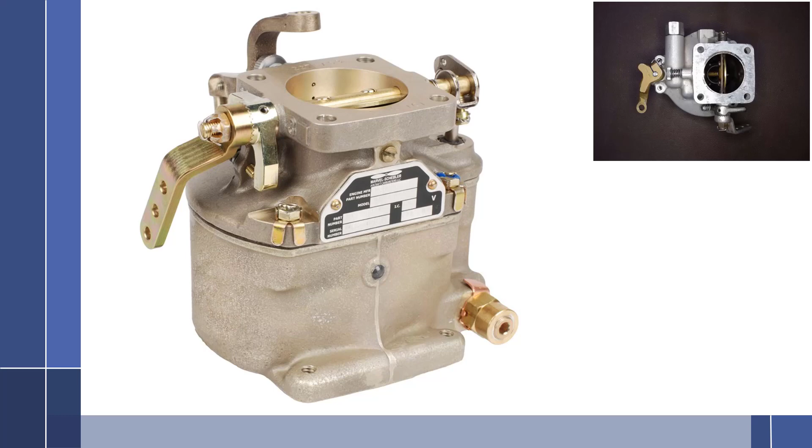Hello, I am Kevin. I am one of the instructors at the Sacramento City College Aircraft Maintenance Technician program, and today we are going to take a very in-depth look at the Marvel Schebler MA-3A carburetor.

This little carburetor is used on small aircraft, say about a Cessna 150 at about 100 horsepower or so type of engine. This particular carburetor does not have the accelerator pump system on it. So if you're looking for a carburetor with the accelerator pump system, that is going to be in a different video. But the great thing about this one is it has some options that the accelerator pump system does not. So stay tuned for that.

All right, let's jump into this carburetor. Like any aircraft carburetor, I like to divide this up into two basic systems: the idle circuit and the off idle circuit. Idle circuit is when your engine's idling, anything up to about 1,000 RPM. Anything over 1,000 RPM, we're pretty much looking at an off idle system. So off idle system is what we're going to look at first.

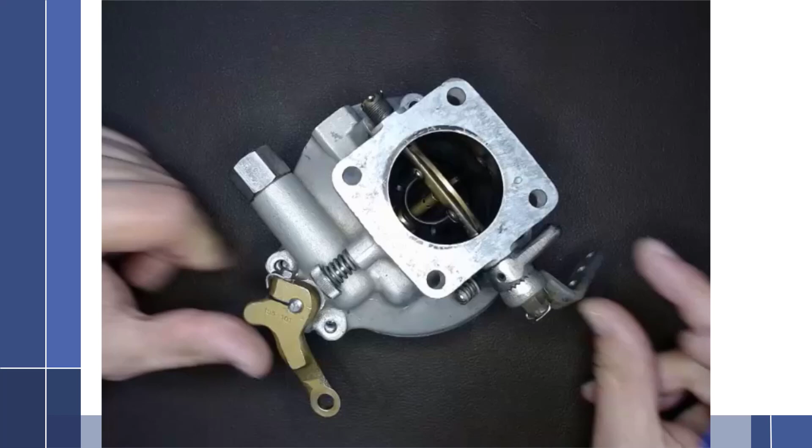But to get acquainted with this carburetor, let's take a look at a couple of items on here. Number one, over here we have the throttle shaft, the butterfly valve or the throttle plate, and we have the manual mixture control over here. We'll talk more about this stuff in the setup towards the end of the video, and also a couple of things about airworthiness directives too.

All right, so let's take this off right here and take a look at what is going on and how this carburetor operates. There we go. So on the inside, you can see we have the float bowl over here. We have the floats over here, and we'll talk about each one of these things as we go.

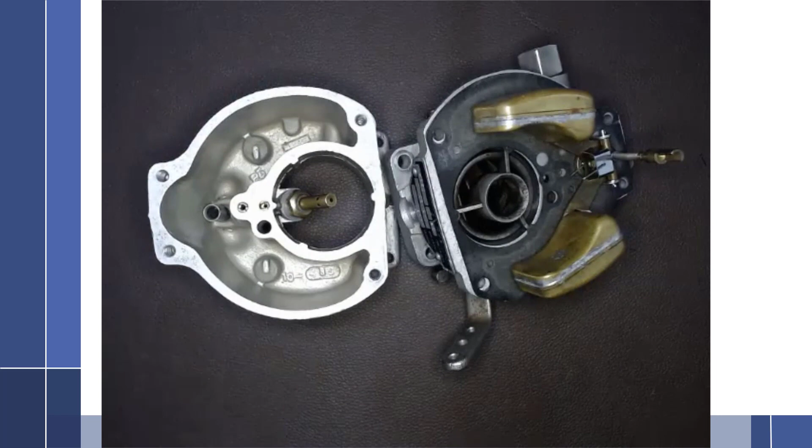All right, so let's turn the page here and take a look at this drawing here. Now, I know this does say model MA-4 SPA, but this is the drawing that is provided by Marvel Schebler to cover both the MA-4 SPA and the little MA-3 carburetors as well. So there's some differences, but for the most part, this is going to walk us right through it without any problem whatsoever. Although I will admit I had to make a few corrections to the drawings.

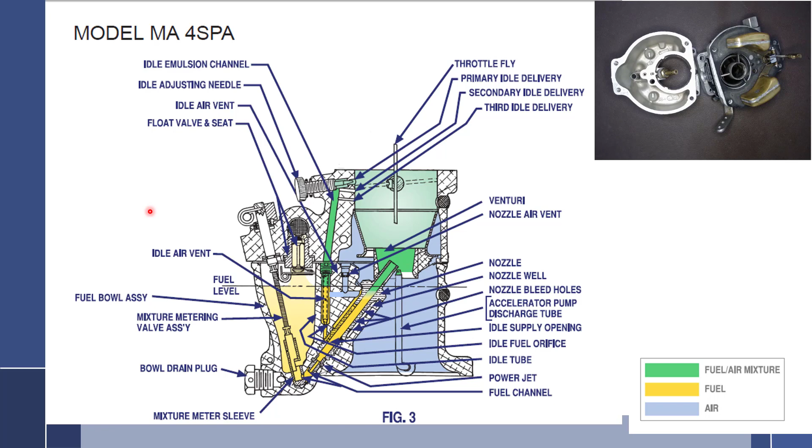All right, so to start with, how does the carburetor work? Well, let's talk about we're a drop of fuel, and let's take a look at the passageways and the path that fuel is going to take.

All right, so to start with, fuel is going to enter here. And there is a screen in here. So that screen should be checked every, say, 100 hours or annual. I would say no more than that. I like to check them every time I do at least an annual 100-hour inspection. We don't want any debris clogging the fuel path. That would be a problem.

All right, so fuel goes through this into this chamber right here where it enters the needle and seat area. So now this, of course, is upside down to the way it sits on the aircraft. Normally it is sitting this way. I'll move it just to the side so we can see.

So when there is no fuel in the float bowl, the floats are going to drop down. And as fuel enters the float bowl, the floats will then float up until it blocks off fuel coming in the needle and seat area. So let's open that up, take a look at the needle and seat area and see what is happening there and how that works.

So we'll pull that pin out. By the way, that pin is supposed to be a cotter pin. There's a lot of things I've already, screws and such that I've taken out already for ease of doing the video. But here we have our needle right here, and this is the seat right there.

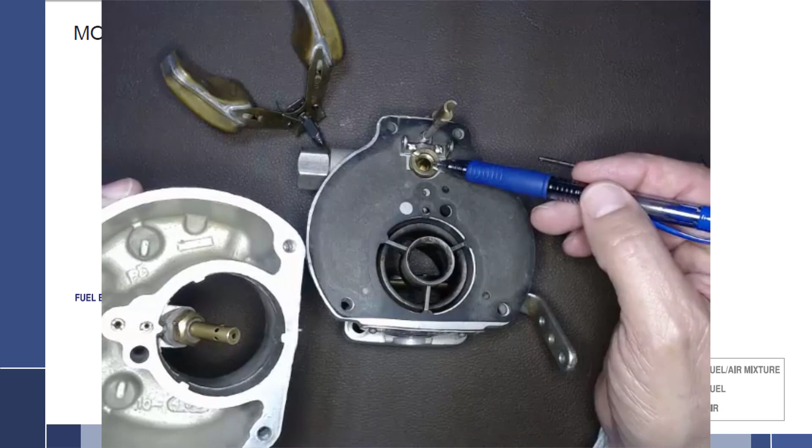So as the floats raise up, that needle right there sits in the seat and blocks off the fuel. When the needle is off the seat here, fuel comes in and out of this hole right here into the float chamber. So it comes out of here, fills up the float chamber until the fuel level gets to a specific height, pushing the needle up into the seat, blocking off the passage of fuel. Now, the level that these floats are at, it's different than some carburetors.

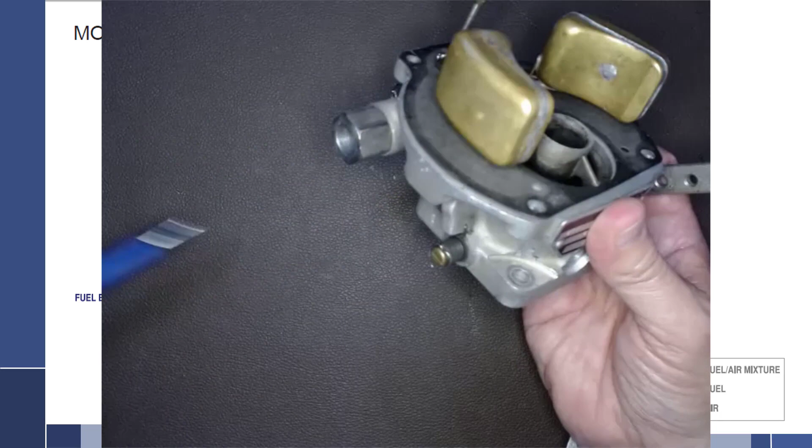We don't actually measure the float level per se, but rather when you get into the instructions, you measure this distance right here with a drill bit or calibrated rod, and that's the float level measured there, rather than the actual fuel level, like a Stromberg, where you'd actually measure the float level directly.

All right, taking this back off, we'll set these out of the way. We'll pull off our gasket and set that aside. So we're talking about fuel coming in through here, filling up the fuel bowl, and we are talking about the main discharge system right now, not the idle system.

Looking at our drawing, we can follow along here too. Here's the screen I talked about, so fuel is going to enter right here. It is going to go through the needle and seat and fall down into the float chamber where the fuel will fill up the bowl until it gets to this fuel level.

There's my desired fuel level. When it gets to that point, the floats will have raised up, blocking the fuel from coming through the needle and seat, stopping the fuel and stopping the level right there. And that's where it will sit until we start the engine.

Once we start the engine and it's running, fuel will be used. As fuel is used, the level will drop down a little bit, and as it drops, so will the floats, which allows more fuel to come in, raising the level back up and keeping it roughly at that point.

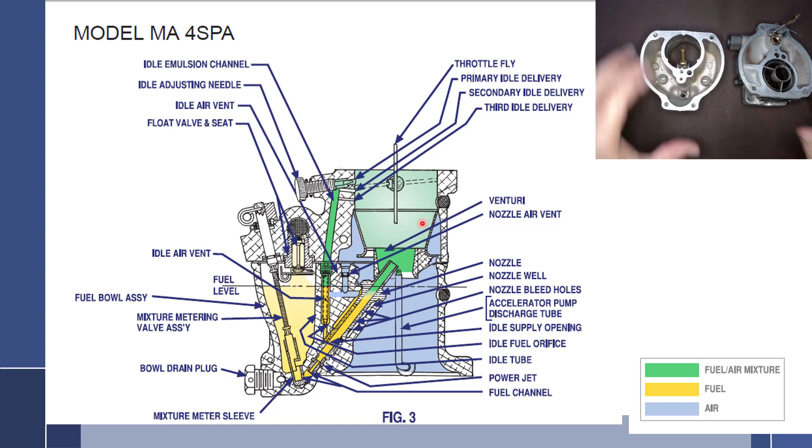What is causing the air to move through the carburetor is we have four syringes, we'll call them pistons. The pistons are moving back and forth and sucking air just like a big syringe, four of them on most of these little engines, and that is drawing in a rather large quantity of air coming across two venturis.

In this particular carburetor we have a primary and a secondary venturi. It's going to pull the air across there. Here's our venturis over here, and you can see them.

The way a venturi works is by Bernoulli's principle, which basically says that as air is drawn across a venturi, the air is going to accelerate. And whenever air accelerates, it is going to have a drop in pressure. So that air moving through these venturis is going to cause a drop in pressure, otherwise known as a vacuum.

That vacuum, low pressure, will want to draw fuel out of the carburetor up and into the engine. The amount of fuel drawn out of the discharge nozzle right here will depend on how much air is flowing through the venturi, creating the vacuum, versus the air pressure inside of the float chamber.

So again, the amount of fuel that comes out depends on the difference in air pressure between the venturi and the float chamber. That difference of air pressure is known as fuel metering force, which is a little strange since we're talking about fuel metering force being air pressure, but you heard me right. The difference in air pressure between these two things is called fuel metering force.

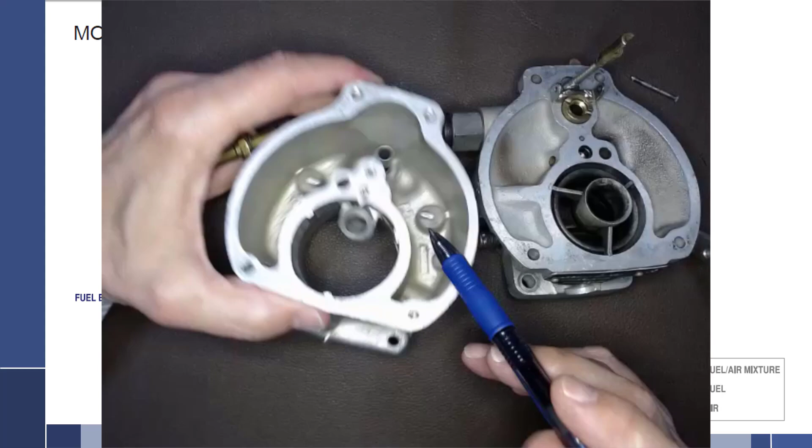Now let's take a look at our carburetor down here. So we have the fuel, as we talked about in the drawing, in the float bowl, and it's going to go down through this hole right here. This is the metering sleeve. So we're going to go through the mixture metering sleeve up into this passageway that's drilled right in like this. And we'll take a look, we'll pull out the discharge nozzle.

And we're going to look at this passage right here. You can see right down in there, the fuel comes through that mixture sleeve, through a drilled passageway into this chamber, where it is going to meet our discharge nozzle. So this is the discharge nozzle right here.

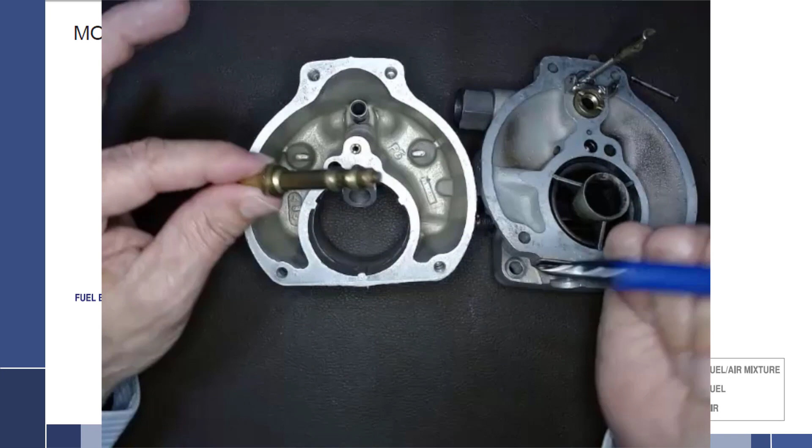This right here on this particular carburetor is called the power jet. So the power jet is the metering device. On other carburetors, we would call it the main metering jet. That's the word I wanted. Main metering jet. On this particular carburetor, it's called a power jet.

Same thing. So this orifice right here is what determines the maximum amount of fuel that is allowed to go from the fuel bowl into the discharge nozzle assembly. So from the discharge nozzle assembly, the power jet up through here, and then out these holes right here along the side and right here out into the low pressure area of the venturi.

So that's all there is to the fuel, the main system as far as fuel goes, right? Just through the screen, through the needle and seat, into the bowl, from the bowl, past the mixture metering sleeve, power jet, discharge, engine. Very simple. But now we have to make it complicated.

You can see that there are a series of holes around here. There are some holes between these threads, which for right now we're going to ignore, and we're going to talk about those later. But these holes right here, one here, one there, and a series of 3 right here, allow air to enter into the fuel stream to emulsify the fuel.

Now we want to add air to emulsify the fuel for a couple of reasons. One, it breaks up that fuel and creates smaller droplets that are more easily evaporated and will allow the engine to run much smoother and cleaner, because we can evaporate the fuel into smaller droplets rather than large globules that have less surface area than a bunch of small drops, and so that's better.

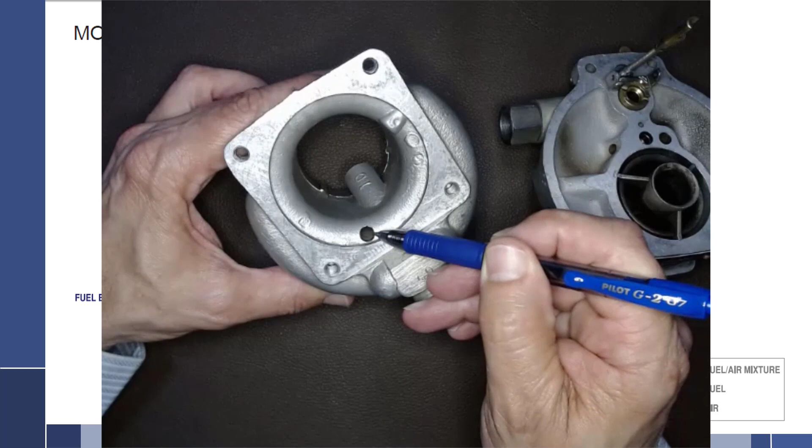So this is the inlet to the carburetor as far as air goes. Air went through the air filter on the aircraft, through the intake system, and then entered into here. So the air going this way is going to go up across the venturi and off into the engine. So any air going in right here is going into the engine.

However, this hole right here is where air is going to enter for our air system that we're going to be looking at internally. So some air is going to go into this right here, and that is just drilled and comes out right there. So air enters here, comes out of right there, and corresponds to this hole right there. So we have this hole. So air is now going to enter this way.

And if we look at it over here, we can see there's a hole here and right there. That is a drilled passageway that drilled right through there. So it tees off, if you will. So this is connected to this, which is connected to this. And at the same time, this passageway right here is drilled down pretty far. We're going to talk about that a little bit later, but it's drilled down far enough that it hits this T right here. So all 4 of these holes are interconnected.

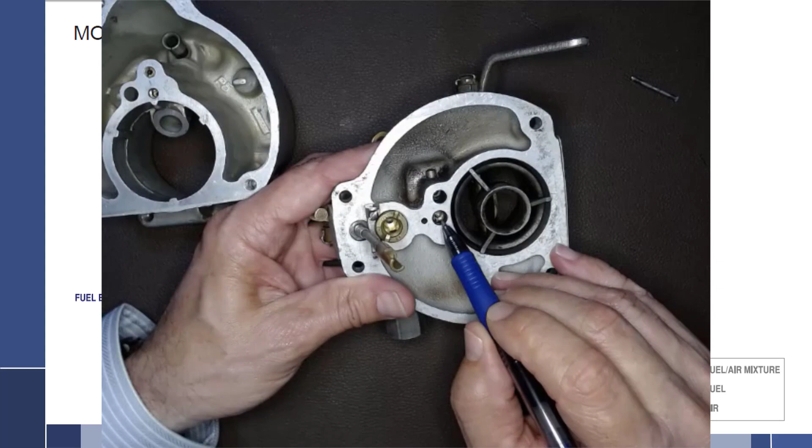Not that one yet. So we're talking about the air here, here, here. They're all interconnected. So again, air was coming into this one. It's allowed to come out of these 2 into the float chamber. So it's venting our float chamber. And at the same time, it went to this spot right here. This corresponds to this hole right here, which is drilled in a couple ways. One, it's drilled backwards.

So right through here into this one—we'll talk about that later. This is drilled straight down into this chamber right here. Maybe you can see right in that, though it's very difficult to see. There's a hole right there, so you'll have to trust me if you couldn't see it.

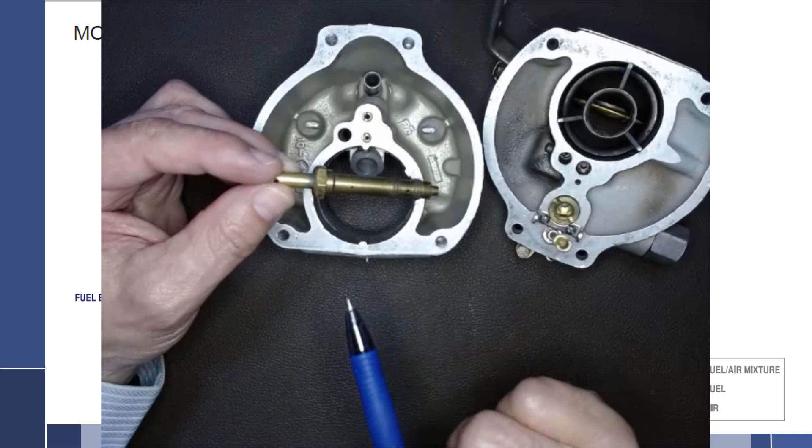So now we have air coming down this way out of here. Real quick: air up through here, up through here, down this way, into the T, turns the corner, comes out of here, goes down in there, and down into there. Once it gets into this chamber, it's allowed to go through these little holes, where it mixes with the fuel and discharges out.

And that's really pretty much it for the main system right there. We've covered both the fuel and the air a couple of times. Let's take a look at our drawing and just go over it one more time.

Air and fuel now discharge out of the nozzle due to the venturi and the difference between the air pressure at the venturi and the air pressure on top of the float bowl, which is referred to as our fuel metering force. All right, so there we go—we have covered the main system.

Now let's move off to the idle system.

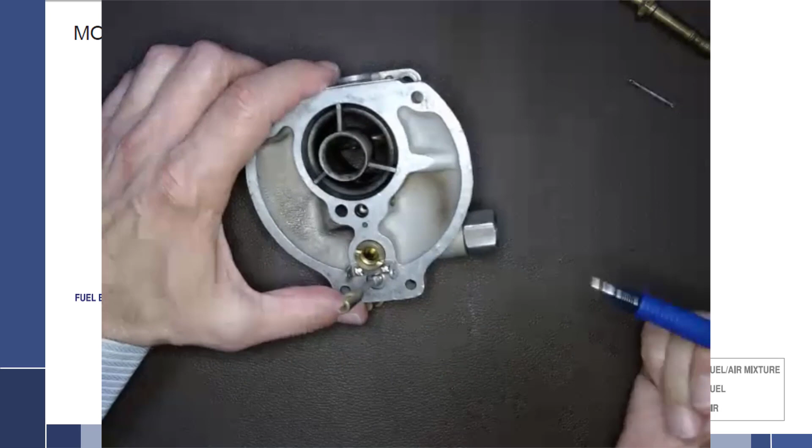So because we have such a small amount of air coming through right here, that means we have very little air going across the venturi. And because we have so little air going across the venturi, there's really not much suction at all—not enough to draw fuel out of the main discharge nozzle. So the main discharge nozzle is completely useless to us because the venturi at this point is useless. We have to have another way of discharging fuel, and that's the idle system.

So again, the path is nearly the same for quite some time. It comes through the inlet, across the screen, out the needle and seat, into the float bowl. From the float bowl it's going to go once again through the mixture metering sleeve and up through this channel, which it did before, into the power jet, which it did before. But instead of moving on into this part of the nozzle, fuel will simply fill up the nozzle.

And we're now going to look at these holes. Before I said we have these holes right here, but we ignored them when we looked at the main system—now we're not going to ignore them. These are a vital part of our idle system. These holes are drilled in between two threads, which pretty much isolate them and create their own little passage.

And what that does: fuel comes up that power jet and out of these holes and off into the idle system. So if we take a look at our drawing over here, we'll see this is right where we were—we had fuel in the bowl.

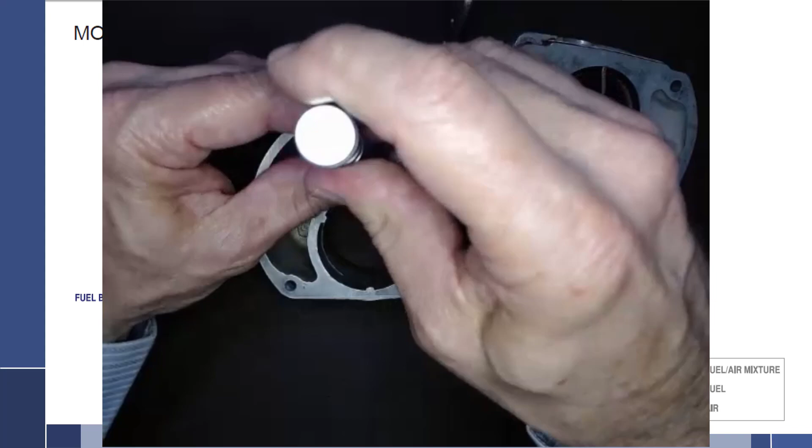It came down through the mixture metering sleeve, up the power jet into this area. Here's where the top threads are. Here's where the bottom threads are. And these are the holes drilled in between those two threads. It is going to go up into our idle tube. So let's take a look at our idle tube.

The idle tube is this passageway right there, and I've already loosened it up so I can pull it out quickly. There we go. Here's our idle tube. Looking at our idle tube, it has a very tiny little hole right there, which is going to be our idle jet, if you will. Just like we had a power jet, here we have the same thing right here. We have the idle jet. So that is the restriction for the maximum amount of fuel that can get up through the idle tube.

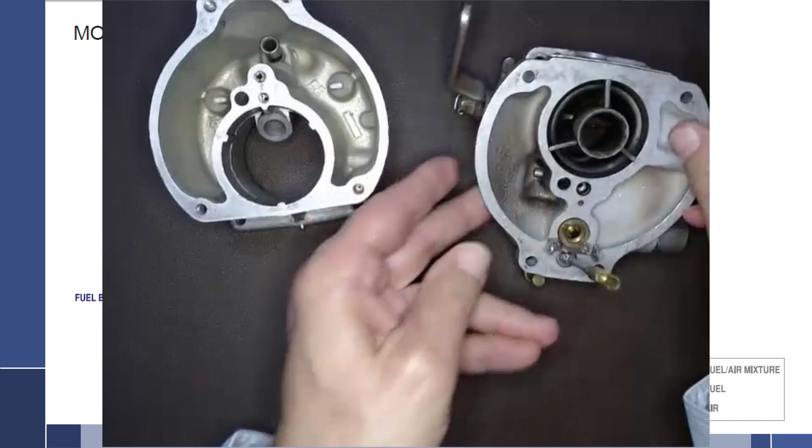So the idle tube then, we're going to notice has a little hole right there. And you can already guess what that's for, I hope. And that is going to be for air. But we'll get to the air in just a little bit. Fuel comes up through this tube, out of this hole right there, because that's sitting right there, into this hole right here, and then up. I know it's down this way, but in the carburetor, it would be up. And those holes right there are going to go up into the throttle body area.

Now let's take a look at our carburetor and see if that corresponds to our drawing. So I'm going to close this. It is spring-loaded to open. And thankfully, the fuel has actually made a clean spot. So I can see 1, 2, and 3 right there. Probably can't pick it up on the camera, but 1, 2, 3 holes, just like our drawing over there. These holes are the discharge holes for the idle fuel.

And what is causing those holes to act as the discharge nozzle is that when this plate is closed, the area above it is subjected to a significant vacuum. Remember, we have 4 cylinders. Even in a Continental O200, that's 200 cubic inches of air it's trying to draw through with each 2 revolutions of the propeller. And that is causing a big suction right here. Air is not getting through this throttle plate very well, so it is going to want to draw whatever it can from wherever it can. And it just so happens that these holes are exposed to that vacuum, and it will draw out fuel from these 2 holes off into the engine.

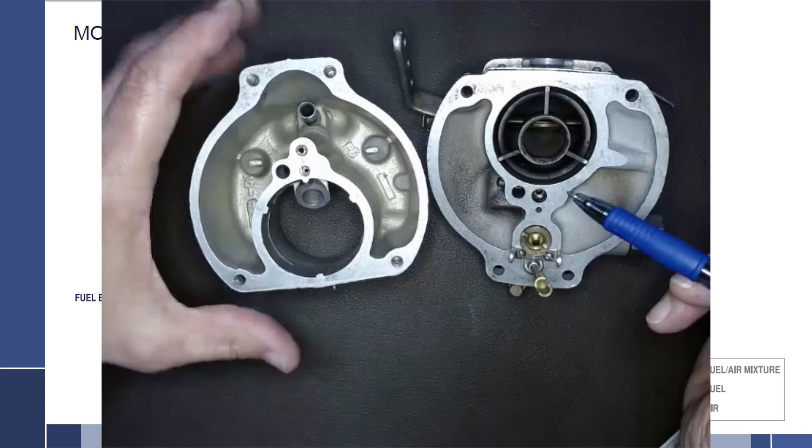Well, if you remember, a little bit ago, we talked about air coming up through here, coming out of here, entering into here where it's teed off. And this is part of that teed system. So air then goes in this way, fills up the float chamber, and then it comes out of here into this right here that's drilled straight down, which will allow us to get some air into this, but it's also drilled backwards.

So if we looked at it, I don't know if we can pick it up on the camera, maybe, but it's right there. It's drilled backwards into that chamber right there. So that is where we get our air right there. So it's right before it enters into this chamber, it breaks off and goes that way. We get air into there, emulsifies, comes up through here.

Now we have air and fuel coming out of this, air and fuel going into this hole. Passageway is drilled all the way up into here where we have the 3 holes. When the throttle plate is closed, we have 2 discharge nozzles. And when the throttle plate opens a little bit, we have 3 discharge nozzles, and that is the idle system.

Now, we will talk about the idle mixture adjustment here in a little bit when we talk about setting up the carburetor. So that is really, in effect, the 2 main systems of this carburetor.

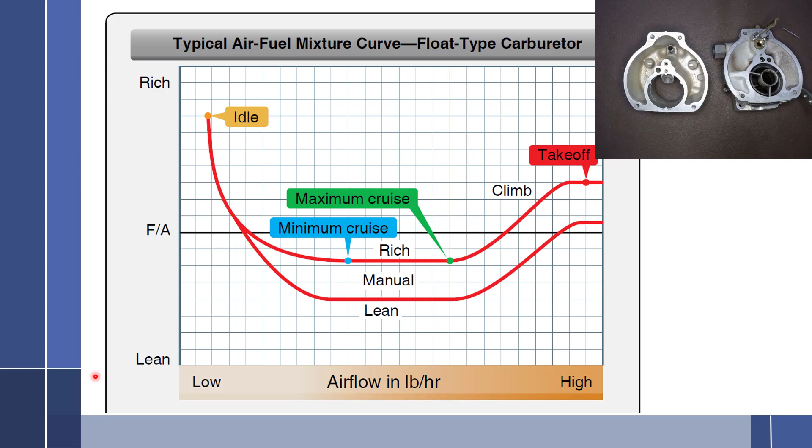If I were elected king for a day, I would call any system that makes the line in the middle go down an economizer, and any system that allows the line to go up at takeoff a power enrichment. That would make things a lot easier, because then we could talk about carburetors that automatically add more fuel at high power settings versus carburetors that drop the fuel in the middle. This particular system we're going to look at pulls the fuel down in the middle. It is called an economizer system.

All right, let's take a look at our economizer system on this particular carburetor. The way it works, we're going to use air pressure, and think back about our air pressures in the float bowl versus air pressures in the Venturi, which was called the fuel metering force. The economizer is going to change the fuel metering force, and the way it does that is through air pressure.

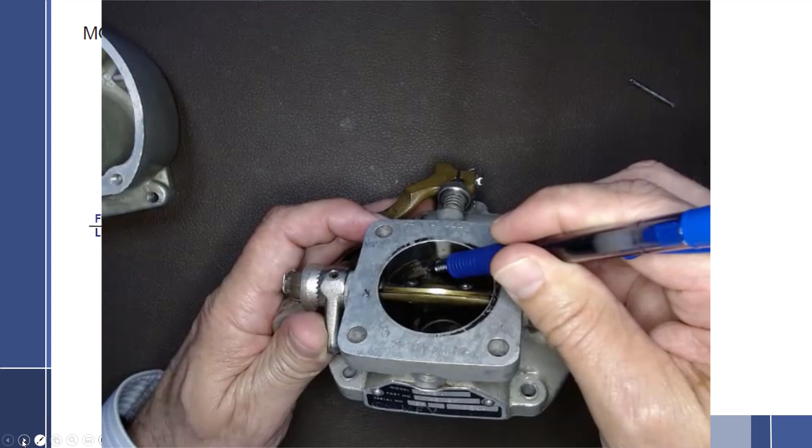Now, what you couldn't see before, and maybe won't be able to see in this particular carburetor, is we talked about these three holes, 1, 2, 3. Hopefully you remember those are discharge nozzles for the idle circuit. Well, what's a little difficult to see is off to the side, there's another hole drilled into this throttle body area. That is the economizer hole.

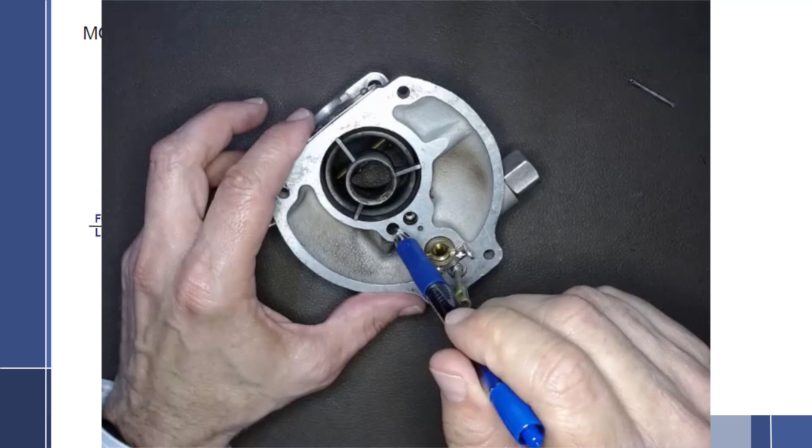We can see up at our chart right here, the economizer hole right there. And that hole is drilled into a passage into this one. Remember, the air originally came through here, up through here, into here, and then teed off. Well, if we go straight down and keep going, there's a little jet down there that is actually attached to that hole right here. So the way this works is when we are at idle...

that hole is covered up and is down in the higher pressure area, because right here is where all the suction is happening. This down here no longer has a lot of suction whatsoever. It's pretty much ambient air, and so that has no effect whatsoever. It's practically assisting this hole right here.

But when we start to open the throttle and uncover that hole right there, now it is subjected to the low pressure area the pistons are pulling. And when we get a little low pressure suction on that, we're going to get suction here, which is now going to take some of the air that was designed to vent the float bowl and take it away. So it is going to create a lower pressure in this area.

Well, if we lower the pressure in the float bowl, then the pressure difference between what is here and what is here at the Venturi is less. So we have effectively lowered the fuel metering force, which means there is less suction on the discharge nozzle, even though there's the same amount of air going through here, and we still have the same amount of suction created by the Venturi. It's just that this is no longer high pressure in the float bowl. It's also getting a little suction to it. So the difference is less, so less fuel comes out.

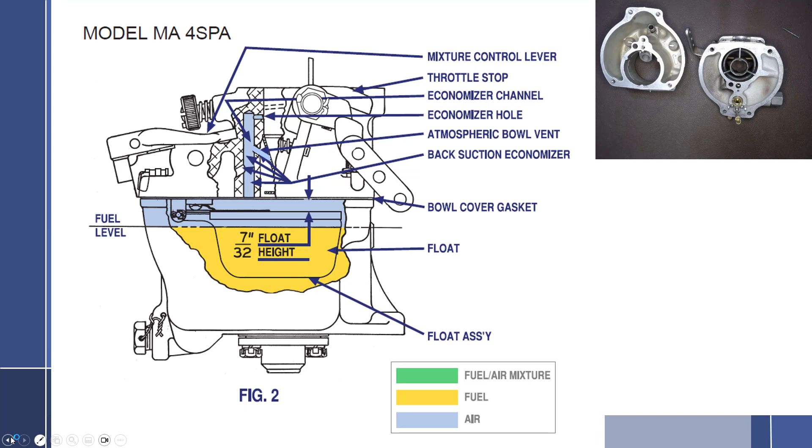So, back suction economizer system — we got that down. If you understood that, fantastic. I think we're both doing great then.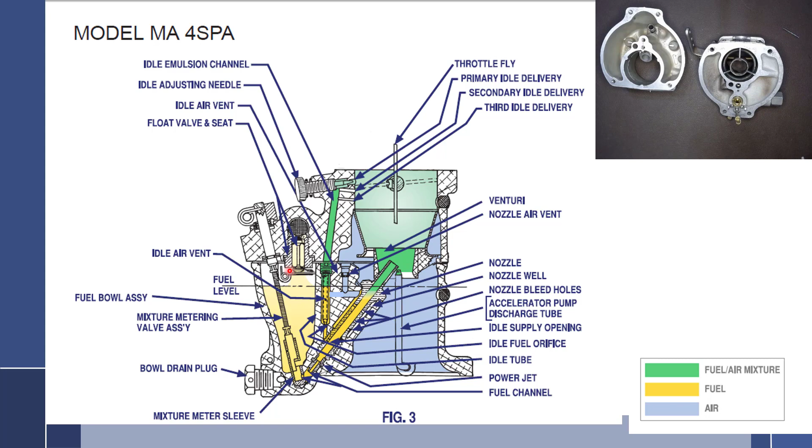All right, so the next system I want to talk about is the manual mixture control system. Let's switch to this one right here, and we're going to talk about it. This carburetor, as pretty much all Marvel Schebler carburetors, has a mechanical mixture system.

As the aircraft goes up in altitude, the brains of the operation, the venturi, has never really been taught how to deal with altitude. It just senses the same altitude all the time. It really doesn't compensate for altitude.

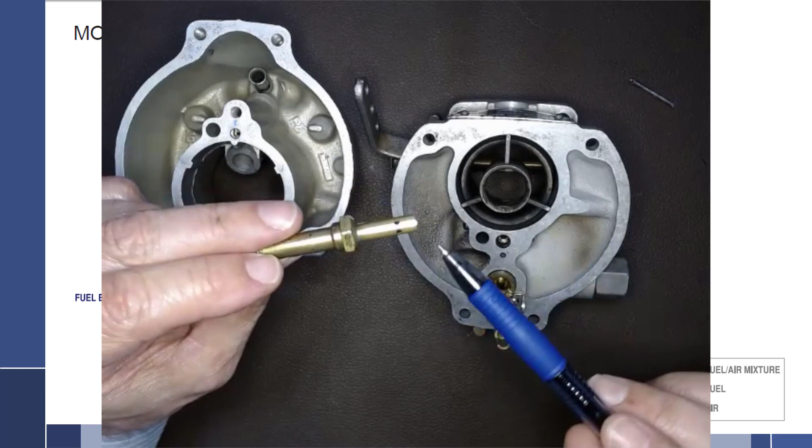So we go up into altitude, and we have the venturi working hard. It's saying, we have X amount of suction, I have that much air flowing through, and that much suction equals that much fuel going out.

But the air around us is decreasing, the pressure is decreasing — we're up at altitude. And now the carburetor is running richer and richer and richer. We already talked about why we don't want an overly rich mixture: waste of fuel, excessive lead, and loss of power.

So we want to lean out the mixture. We need to tell the carburetor, hey, we're up here at altitude, we need a little less fuel please. That is done through the manual mixture control system, which is controlled in the cockpit by the red knob right here.

So we push forward for rich and pull back for lean, and the all-the-way-back spot is called idle cutoff. That's rich, and that's idle cutoff. What's happening is that's moving this valve, or this arm, which goes into the mixture metering sleeve right there.

When we are at full throttle, this sleeve is wide open in here and doing absolutely no metering whatsoever. It's wide open, and the only thing metering any fuel is the main power jet.

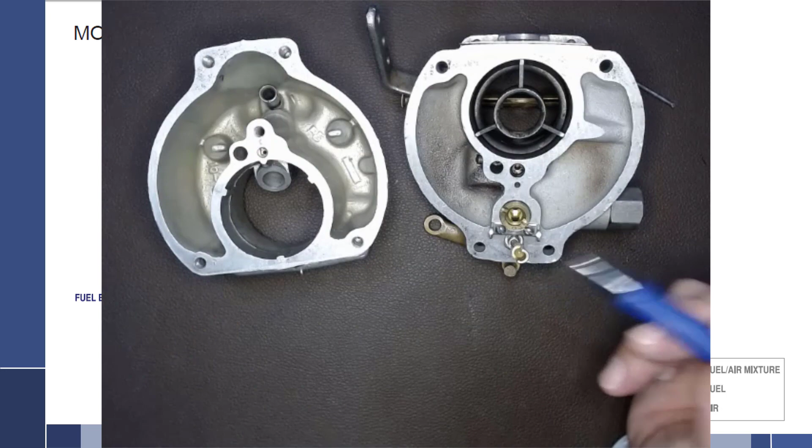But as we start pulling back on this shaft, this rod will rotate and start blocking off that slot down there, to the point where it gets smaller in total than the power jet. If this is the smaller of the two, then this now starts doing the metering.

And so that's exactly what happens. We keep pulling this back, making the slot down here smaller and smaller, which manually leans out the mixture, until we pull this back so far that this valve actually closes off that slot completely, cutting off all fuel.

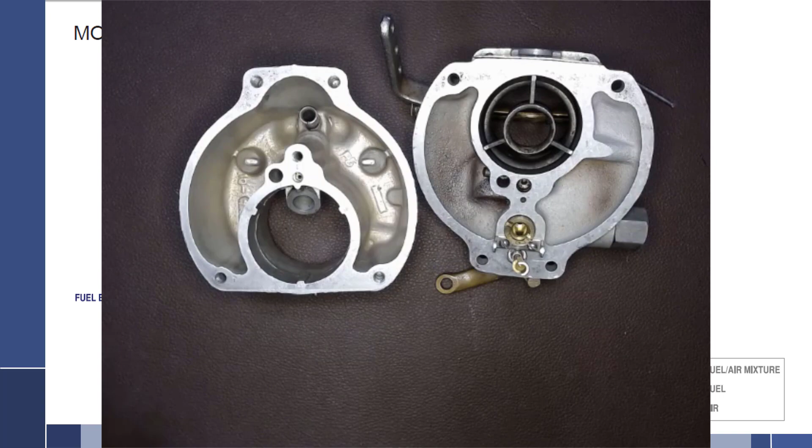That is a wonderful thing to have, because this is how we would shut the aircraft engine off in this particular type of carburetor — which almost all engines have, unless it's got the Stromberg carburetor. You pull the mixture all the way out and the engine dies.

So that is all there is to it as far as the mixture control system goes. Now, I will throw this out.

It is not terribly uncommon to get an aircraft carburetor that has been overhauled, reinstalled on the engine, and the pilot or mechanic pulls back the mixture control into idle cutoff, and the engine keeps running and never cuts off. Why does that happen? Because this rod didn't make it inside that sleeve. It's setting somewhere on the outside of it. So when you put it together, you must make sure the sleeve and rod go together so the valve assembly fits in there. So we have that going on right there. That is the manual mixture control system.

Let's talk about the acceleration system in this carburetor. At the beginning of the video, we talked about the fact that this particular carburetor does not have an accelerating pump, but it does have a sort of de facto accelerating system. When we're in idle and we have fuel in the bowl, fuel comes up here and goes through the idle system, as we already talked about. But also, because the fuel level is right here, when the aircraft is off and not running, this fuel is going to find its level in both the idle tube and the main discharge nozzle up to this line. So in the off position, fuel fills up the fuel bowl, fills up the idle tube to this level, fills this point, the discharge nozzle, as well as this area in between where it's supposed to be air. Fuel comes up through the power jet, comes in here, goes out all the air holes, and fills all of this up with fuel. It sits just like that until there is fuel drawn out.

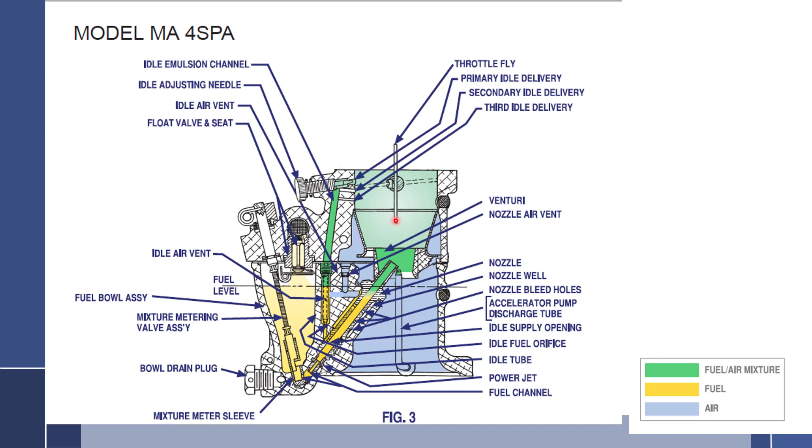So you excitedly open the throttle, and you're going to get a massive inrush of air through the carburetor. If we didn't have extra fuel, it would probably stumble or go a little bit lean right there. We need the carburetor and engine to not stumble, but do a nice acceleration. So we have an extra charge of fuel waiting to go out, and that would be the accelerating well system.

Now, the last thing I want to talk about here is how to set up this carburetor. These carburetors are actually very easy to set up, wonderful to work on. I love the Marvel Schebler for that very reason. So we are going to put this back together a little bit so we can have a completed carburetor and talk about the setup. Now, the setup involves only two adjustments: the idle mixture and idle speed. Those are the only two screws that you can actually even turn on this carburetor to do anything, so it makes it quite simple.

Now, to set up this carburetor on an aircraft engine, what I like to do first is look at this idle screw right there, as I mentioned, and all it does is provide a stop.

When this arm comes back, you can see that it hits that screw. Where it hits the screw is how far open this butterfly will be. How open it is determines how much air and fuel will get through and adjust the speed of the engine. If I were to take a screwdriver and back this out a little bit, I'm going to close the butterfly valve. If I screw it in, I will open the butterfly valve. It's just that simple. It's just a stop for how much speed you want.

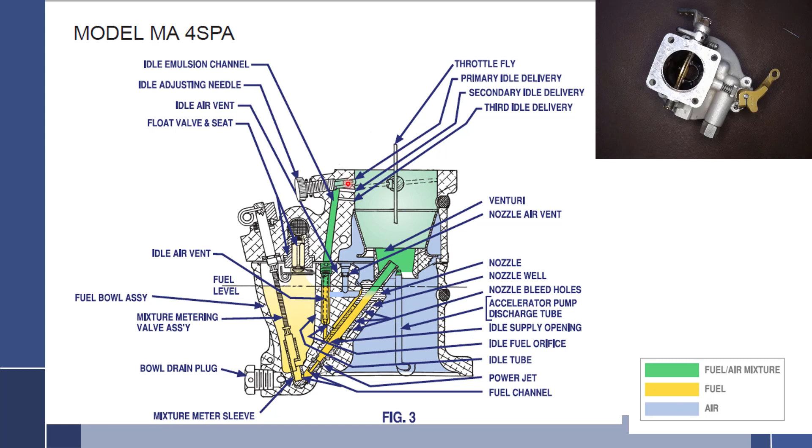So we simply adjust this right here. And it says right on there, R and L, which is not left and right, it is rich and lean. It tells me right there, if I want to lean it out, I will screw this in, which, if we go to our drawing over here - remember this idle system right here? When we screw that in, there's a needle and seat, and we restrict this opening right here, decreasing the amount of fuel.

So I will screw this in, decreasing the amount of fuel, until when I pull it back to idle cutoff, I get a 50 RPM rise. Now, if I got no rise whatsoever, that means it's already on the lean side and I got a rich adjustment needed. So I will back this out and try it again.

Start up the engine, pull this back, and if I get a 25 RPM rise and it dies - well, if I want 50, I can just give it a little bit more. Start up the aircraft, try it again, pull the mixture out. Once I get my rise right about 50 RPM, I'm happy.

Then I will set the idle speed, because this will change the idle speed as you're working on it. So it's really difficult - if you set this screw first, then set this, you go back and it's idling too fast. So trust me on that: back this out, get your mixture set where you want it, then start up the engine again, set the throttle where you like it in the cockpit, lock it in, and bring this screw in until it just touches the throttle arm, and then we're set for a final adjustment.

So again, in the cockpit, we start up the engine with it in full rich. We have it in idle.

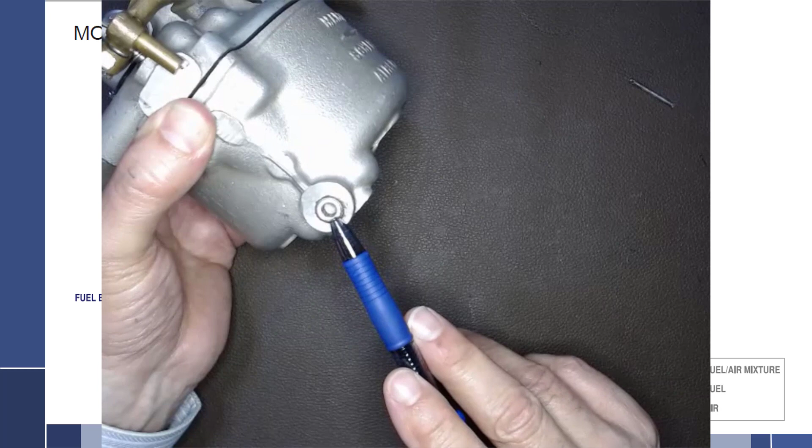Before we finish off, I want to cover a couple of things that tend to catch people on these carburetors, and we want to be very careful of that - a little bit of maintenance and airworthiness directives. We talked about how to set up the carburetor properly, but I haven't yet talked about this right here.

It's very important on any carburetor that you drain the fuel bowl out at least every 100 hours or every year. A couple of things - the more often you pull this plug out, the easier it is to take out. If you only do it once every 5 or 10 years, it can be very difficult to get that plug out, and you will not enjoy that job.

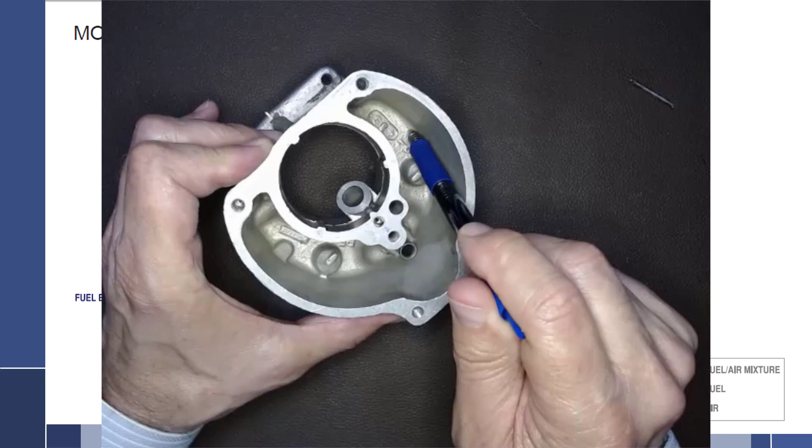What happens inside the float bowl is if you get any water into the system, the water is going to drop down to the lowest point into this little well right down in there, and you can get corrosion in there. On some of the other carburetors, the outlet to the engine is much higher, leaving even more room for water down here, and that water will cause corrosion and ruin a carburetor bowl. So not only will it ruin the carburetor bowl, but if water gets into the engine and it quits, that will ruin everybody's day.

So we do not want that to happen. So make sure you drain the bowl, I would say every year, every 100 hours is my rule of thumb on that.

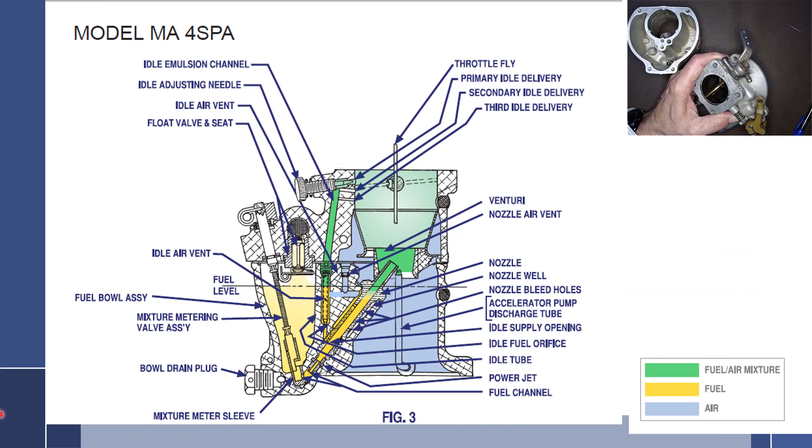Now let's talk a little about airworthiness directives. This carburetor does have several airworthiness directives, and most of them are self-explanatory and easy to understand. But there are 3 that I want to hit on real quick. The first one is 72-06-05R2, and that deals with the throttle arm. And unfortunately, the AD is not well written in a way that it's easy to understand.

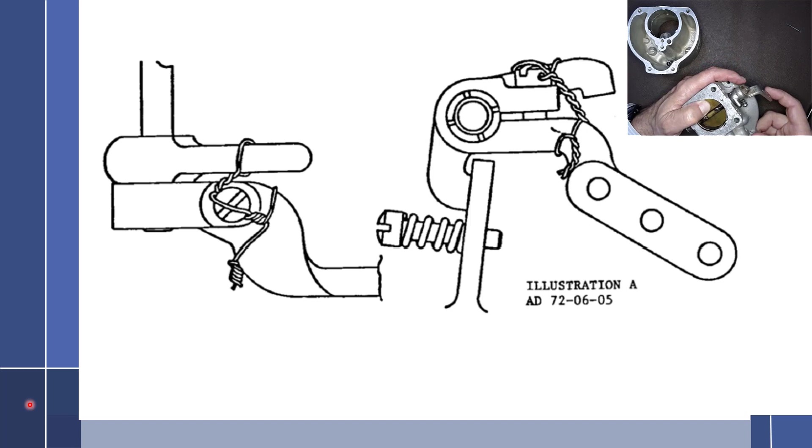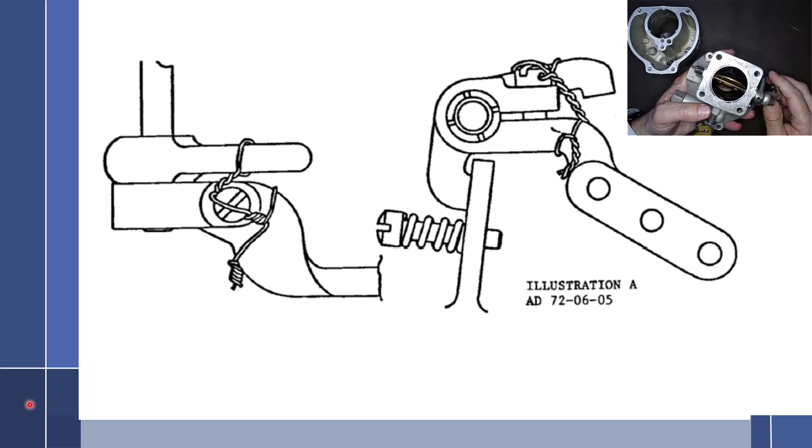And so I'm going to switch slides over here, and hopefully the next one pops up. Let's see. There we go. So the AD talks about if you have a certain type of throttle arm, and one of the things it talks about is is it milled flat or spot faced? And that's a term that a lot of people are not familiar with. And something that is milled flat versus spot faced is important to understand in the AD. A lot of people just simply look at those terms and go, well, I don't really know what that means, so let me guess. And let me tell you, if you want to be an aircraft mechanic, never guess, ever. Ask for help. Figure it out with somebody who knows.

So something that is spot-faced means they have a casting, and in its final finish process, they took a cutter on a mill, which is very similar to a drill press that allows a table to move around. And they will take a cutter, I'll use my flashlight here as the cutter. It comes down, it hits a spot and moves off. It was just spot faced. Like we could say that's spot faced. The cutter came down, cut it, and then was removed.

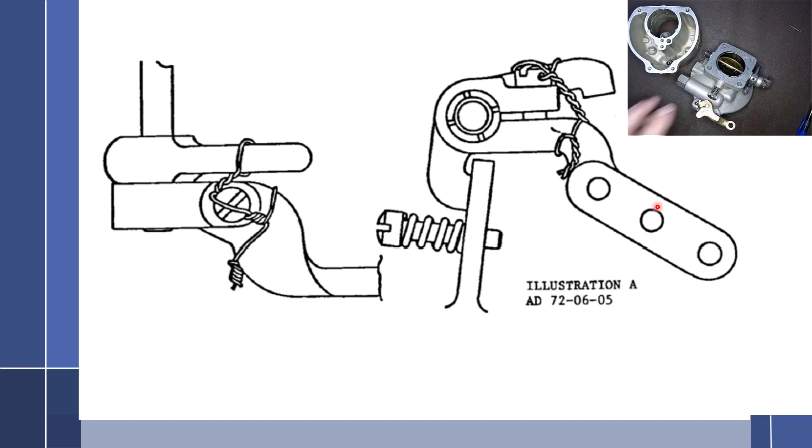So spot faced. But something that is milled flat, you would take the same cutter, and this entire surface up here has been milled flat. So the cutter then would go back and forth and mill this entire thing flat. So this is milled flat versus spot faced. So when you see this AD and they talk about this arm right here, was it milled flat or was it spot faced? Hopefully you will know the difference and be able to see which one should be removed from service and which one is acceptable.

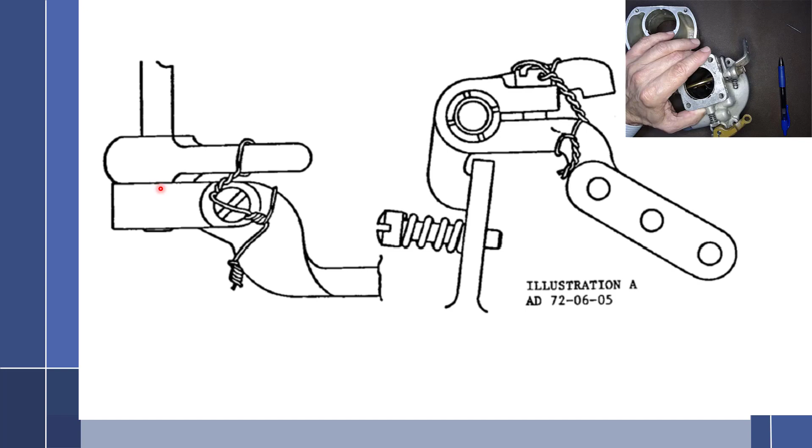Now, the thing that is even more confusing is the fact that the AD never makes a reference to the new style throttle arms. So here you're reading this airworthiness directive, you're trying to figure out if this is milled flat or spot faced or what's going on. And the entire time it was non-applicable because the AD never addressed the serrated styles, what I call them.

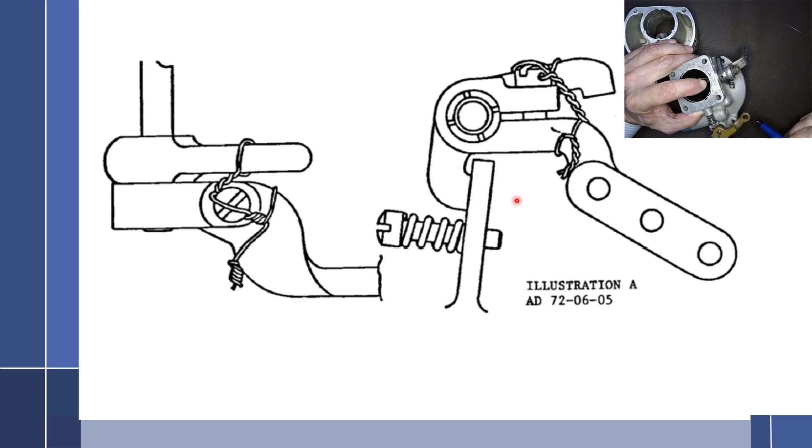So if we look at the picture, the problem with this AD was this right here, this entire system clamped, and there was no positive engagement between, we'll look at the carburetor here, this piece right here and this piece. And so there was a potential for the two to slip, and you can imagine how bad that would be if you were in idle and you wanted to go full throttle and you push this lever forward, but this part right here that's pinned to the butterfly valve never opened. Well, then you wouldn't get full throttle, and that would be very bad for the pilot.

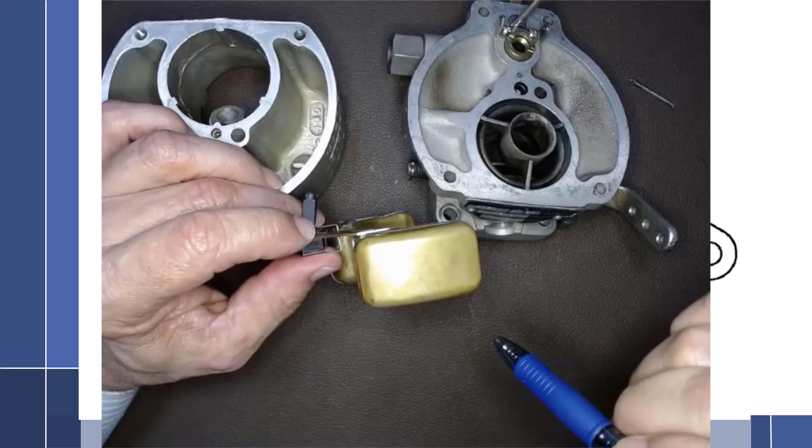So there was a procedure, looking at the drawing, whereby you had to make sure that you had the correct arm and safety wire it in such a way that the two pieces at least followed each other reasonably close should some slippage happen. Well, now they've changed out the throttle arms, and so there's this serrated type, which is clamped with this nut right there. There's no way these two are going to move because of the way they are locked into place. So this airworthiness directive would not apply, or more appropriately, it has been complied with by installing a different style of throttle arm. The next one that I would touch on just briefly has to do with the floats.

Now, the floats have gone through some progressions on these carburetors. There have been these metal floats, there have been black composite floats, there have been white plastic floats. The problem with all of the ones I just mentioned is they were prone to failure. These particular floats, and especially the white composite floats, or I should say plastic because they were hollow, get little pinholes in them, and those pinholes allow fuel to seep into it.

The surprising thing is the fuel will get in, but it won't get out. So it's very hard for these to be perfectly sealed, apparently. And not only that, they can be crushed. They're very delicate. So Marvel Schebler has gone to a new style of blue composite floats. If you see the white float or the black float in the field, they need to be replaced with the blue composite floats.

But there's an airworthiness directive on these particular metal floats, AD 93-19-04, which talks about if you have a float with part number CF30766, you need to pay attention, and there are certain dates you have to remove it.

The point I want to make here is, I don't know if you can see that in the camera, but it's definitely a part number 30-766. But what did the Airworthiness Directive say? It said part number CF30766. This does not have a CF on the beginning. The point here is that there are several different manufacturers of parts for these carburetors.

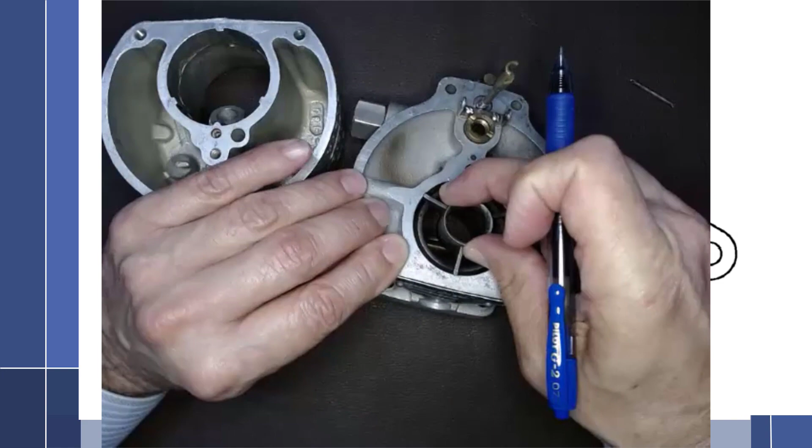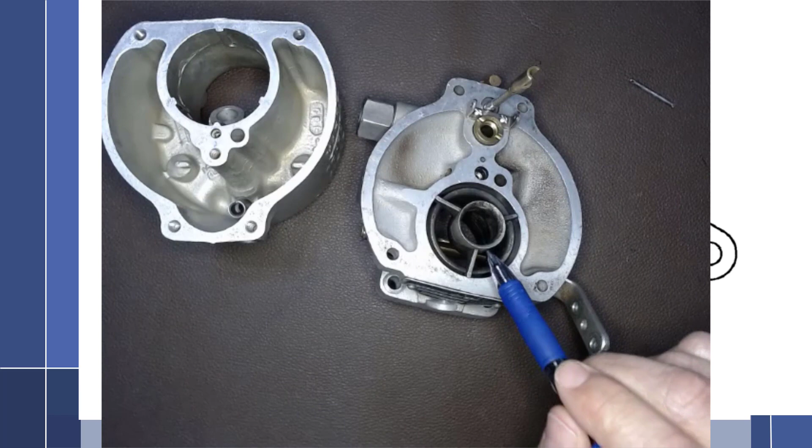There is an AD 780106 on the two-piece Venturi. This one's a bit of a head scratcher for me because this is a single-piece Venturi, and I can tell that just by the way it's manufactured. The old two-piece Venturis, this primary Venturi actually could come out and leave the secondary in there. This is a one-piece, it's all manufactured together. The old two-piece was split right in here, and there were three little clips that held this primary in. Well, that primary would get loose and get ingested into the engine, which was a very, very bad thing.

So Marvel Schebler said, well, you need to go to a new one-piece Venturi. And that made a lot of sense. But here's the thing that's confusing: this Venturi looks exactly like the old two-piece. They look so identical that it really takes somebody who's overhauled these things and is familiar with them to identify, oh no, that's a one-piece, I know where to look. Anybody who opens it up who's not experienced will say, yeah, I don't know, I can try and pull this out, and if it doesn't come out, I guess it's a one-piece.

But what is so interesting is they look so identical, yet Marvel Schebler had a lot of problems when people went to the one-piece Venturi, with the engines no longer running very smooth. They had a horrible time getting the engines to run smooth. And so in the Airworthiness Directive, it does talk about a different style of nozzle. You may see a different style of nozzle that was used in that carburetor to get that one-piece Venturi to actually work appropriately in that engine. So it was a very strange thing.

I guess the point there is, number one, be aware that you need to have the one-piece Venturi. If you have a two-piece, you have to inspect it fairly often. And number two, you may have a different style of nozzle in there. If you were working on that carburetor and for some reason wanted to change the style of nozzle, I would be hesitant to do that if the owner said the combination was working great. You may end up going to a nozzle that didn't run quite so well.